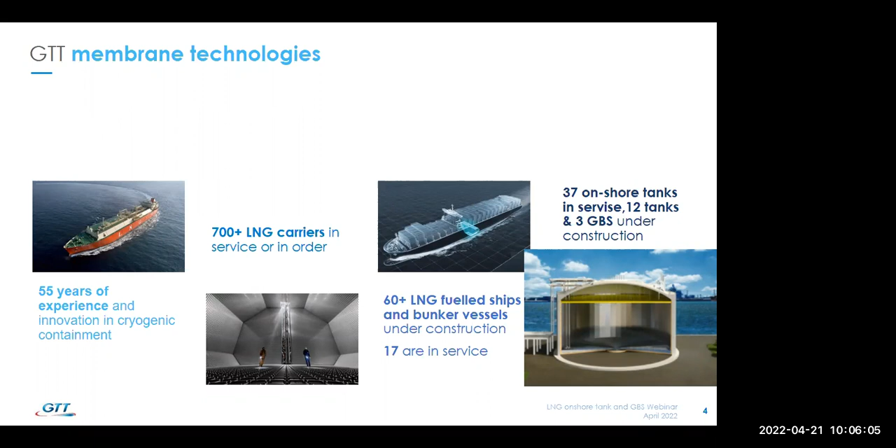Let's now dive into more details about GST technology. Our purpose here will be to present the design philosophies of GST tanks. Here, we are comparing our GST philosophy to the main onshore tank storage competitor, 9% nickel technology.

Both technologies are recognized by the main international codes to be at the same level of safety, as both systems are considered full containment, able to contain any potential leakage in the concrete envelope and avoid any gas release into the atmosphere. But the way to achieve this function is not the same, and there are some important design philosophy differences.

The main difference between both technologies is that membrane relies on separation of three functions: structural, insulation, and tightness, whereas 9% nickel uses different structures or components to achieve different functions. For example, mechanical loads from the cryogenic liquid are handled differently: by concrete structure on GST tanks, and by self-standing internal metallic structure on 9% nickel tanks.

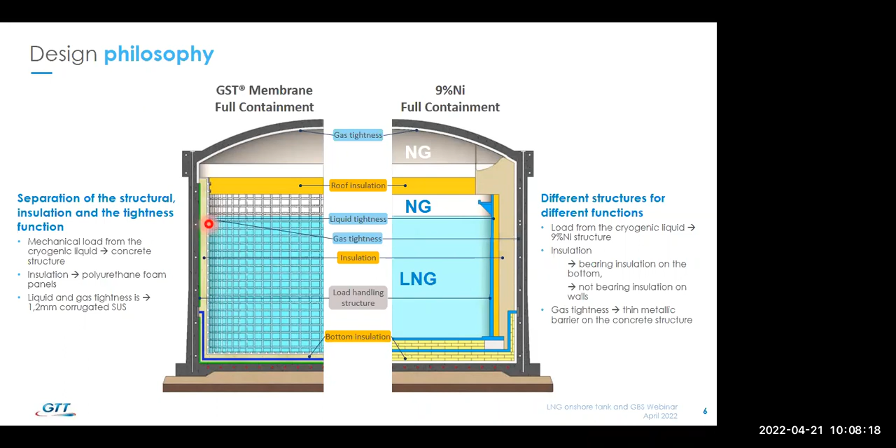The second example is that membrane tanks use so-called load-bearing insulation, made of polyurethane foam, so that the tightness barrier and insulation do not have to handle the liquid pressure load. They just transmit the load to the concrete outer tank. The last example is that both tanks have liquid and gas tightness barriers, but for membrane, tightness is guaranteed by corrugated stainless steel of 1.2 millimeter thickness.

This leads directly to my next point: what does the membrane system consist of? Technology used for membrane land storage tanks is similar to the Mark III system used for vessels, and it benefits from a very large return of experience.

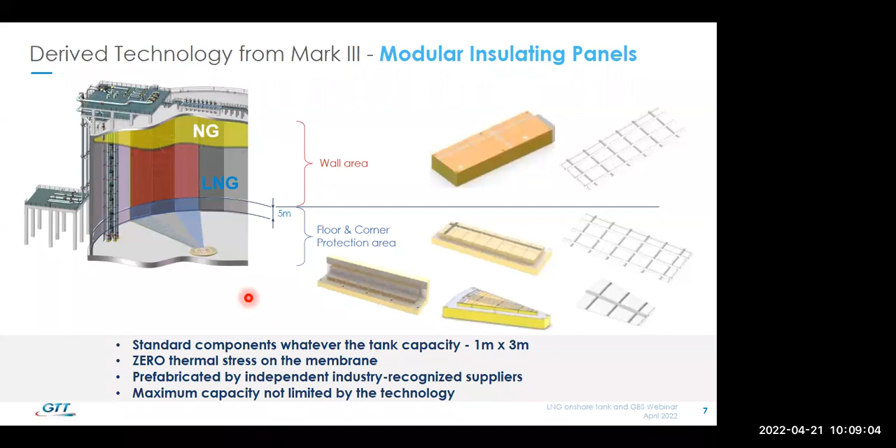For onshore tank, the design is optimized with its patented innovative arrangement, which limits the number of components. With only two elements, triangular and rectangular, 95% of tank surface can be covered. The panels are standard size, 1 by 3 meters, whatever the tank capacity.

Thanks to the double network of orthogonal corrugations of the primary membrane, which behaves like bellows and allows for free contractions and expansions, the thermal stress on the membrane is almost zero. Moreover, the membrane system has no theoretical limit of capacity. Therefore, the design limitation will come from the civil outer tank, geotechnical and seismic data, but not from the membrane system.

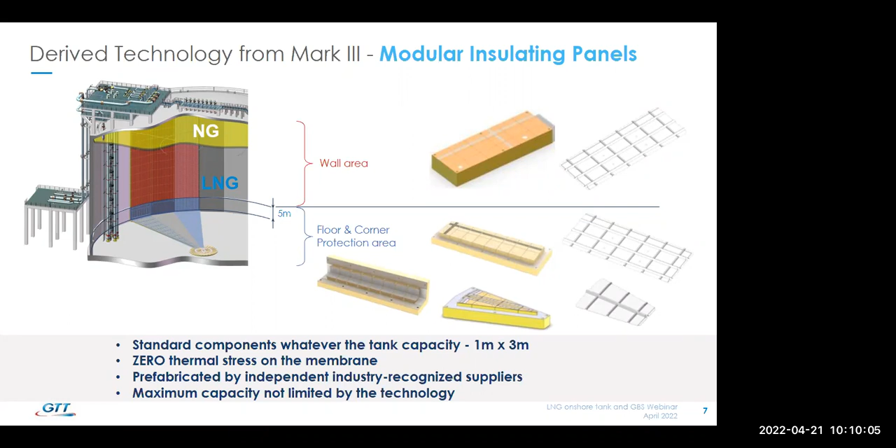What do you think? Will there be any difference if we compare two technologies with the same footprint? Let's have a look at this slide.

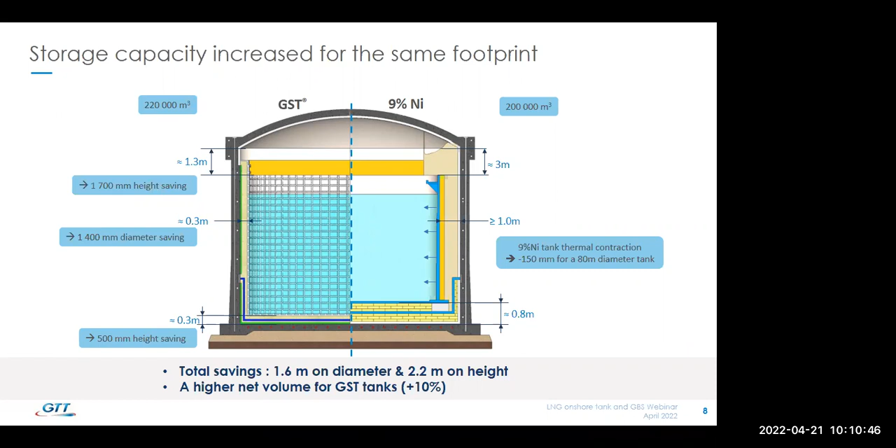Is there any way to increase the storage capacity even more? Yes. To improve the net volume even more, one of the GTT innovations is the use of the sump pit for pumps. They are dedicated to perform more efficient pumping of LNG at the bottom of the tank by minimizing the residual liquid level. This is not possible for 9% nickel tanks, as the tank shrinkage due to cryogenic temperatures will cause problems at some locations.

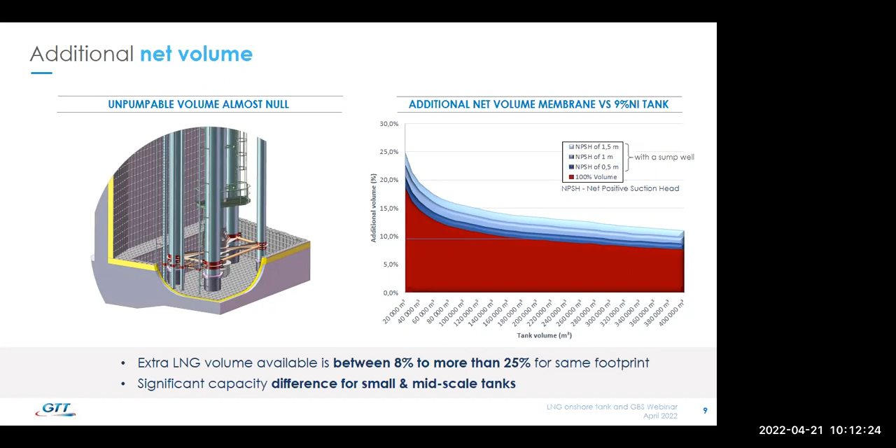Now I give the floor to Amaury, who will present environmental assessment studies.

Thank you, Natalia. In this second part of the presentation, I would like to talk about a recent study done to evaluate and compare the environmental impact of GTT and 9% nickel tank technology. Our starting point was a previous study done on CO2 emissions 5 years ago. And knowing that environmental aspects are nowadays a topic of interest due to stricter regulation, political and general will, the objective was to update and complete the picture with up-to-date tools and data.

To do so, we worked with an expert company on doing this type of assessment, which is RDC Environment. It's a Belgian company. First, I will make a brief overview of the case study hypothesis we've selected, and also on the methodology used to realize this comparison.

So to explain the case study, we can see a summary here. We are considering a 220,000 cubic meter LNG tank, which is built in China, and has standard characteristics, boil-off, lifetime, etc. Of course, both technologies are considered with the same inside volume.

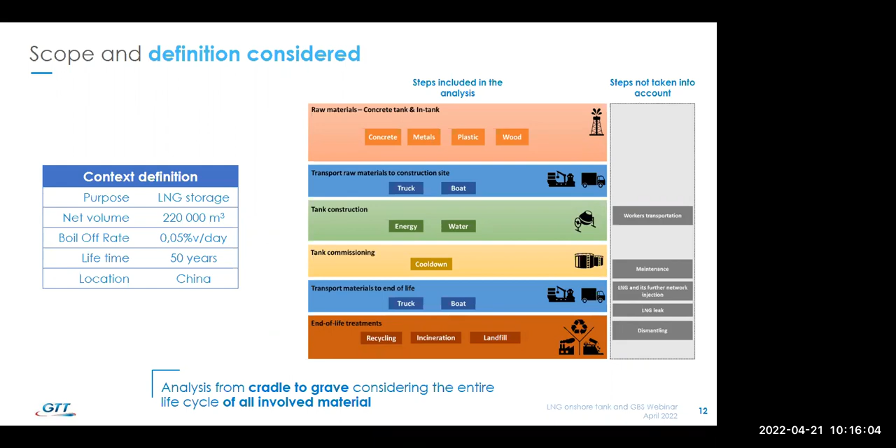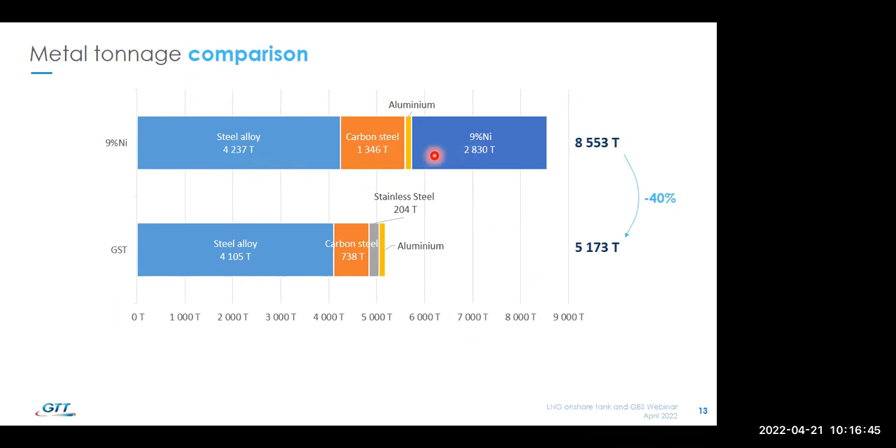It's covering the external envelope and the inside barrier. If we focus, the external envelope, mainly the concrete part, is mainly steel alloy and some carbon steel. If we focus on what is inside the tank, what is different between both tanks, meaning the 9% nickel plates composing the primary barrier inside the 9% nickel tanks, and if we consider the stainless steel, which is the barrier for the membrane tanks, we have a 75% difference of metal quantity. So that's really something important, having influence on the environmental impact.

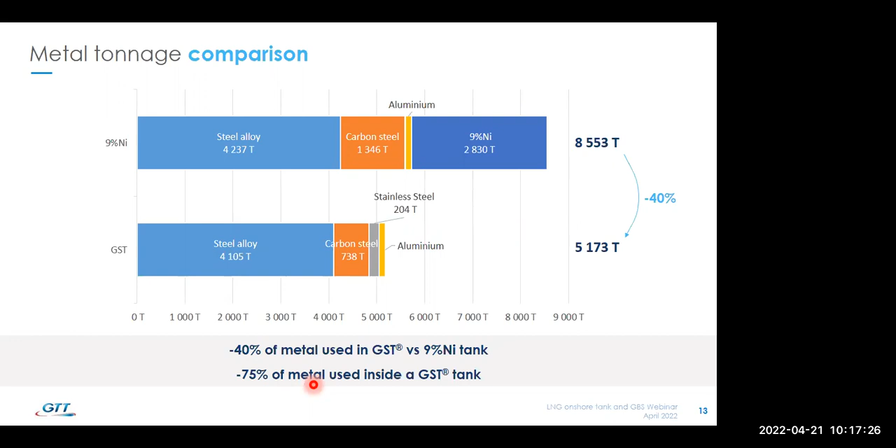So now that we had a look at the cases considered, let's have a look at the methodology used.

This study evaluates the impact on 16 different indicators, not only CO2 emission, but much more than that. These indicators are defined by the Joint Research Center, an organization providing scientific advice and support to the European Union Commission. You can see them listed here, and they can be summed up in a global figure called the average world citizen equivalent unit. Here is the ponderation factor used to sum up these different indicators, giving a global value to make a global comparison of the impacts.

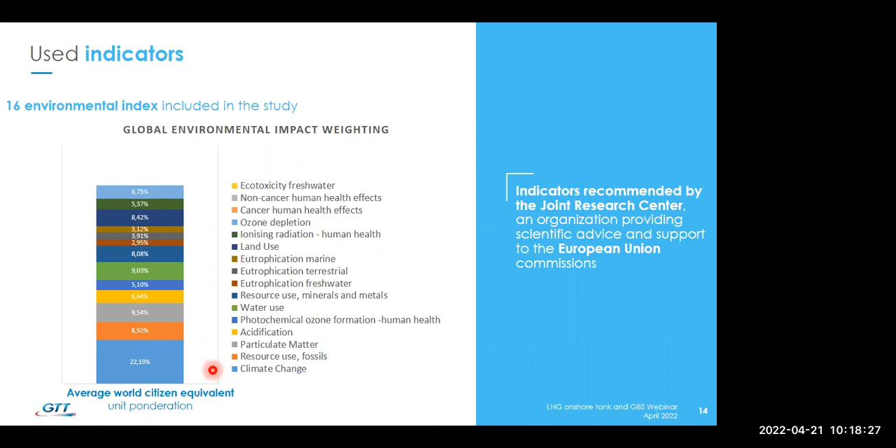So now we had a look at the hypothesis of this study, let's have a look at the results.

Here is an overall view of the results, expressed in average world citizen unit, the global figure I just presented. We can see a global difference of minus 23% of impact between 9% nickel tank, which is here, and GST technology, which is here. We can see there is difference mainly on three aspects: climate change, fossil resource use, and acidification factor. These are the main differences between both. So we are going to zoom in on these three elements in the coming slides.

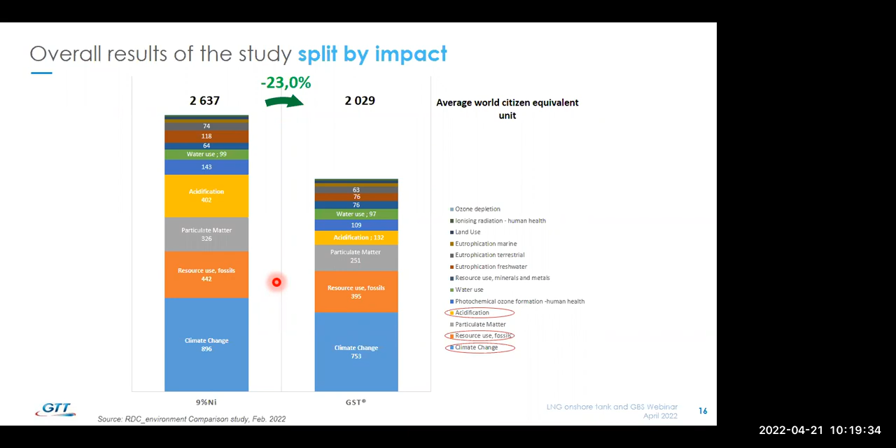Let's look at the first one, climate change. The climate change indicator is a CO2 emission equivalent unit, so in fact it's CO2 emissions. It's split here into the different sources of emissions: construction and energy emission sources, commissioning, all the transportation of different elements, material fabrication is a source of emission also, and it's also including the end of life contribution. But as it is a recycling process, it's counted as a negative value. We present results where the global total is the sum of positive emission and recycling process, which is negative, giving the global value.

Comparing both totals, we have a 16% difference between 9% nickel tank and GST. These 16% mainly come from the in-tank metal part, where we have a 62% difference of emission between both, directly linked to what I mentioned before, the mass of metal difference. To remember, there is a 75% difference of metal mass inside the tank.

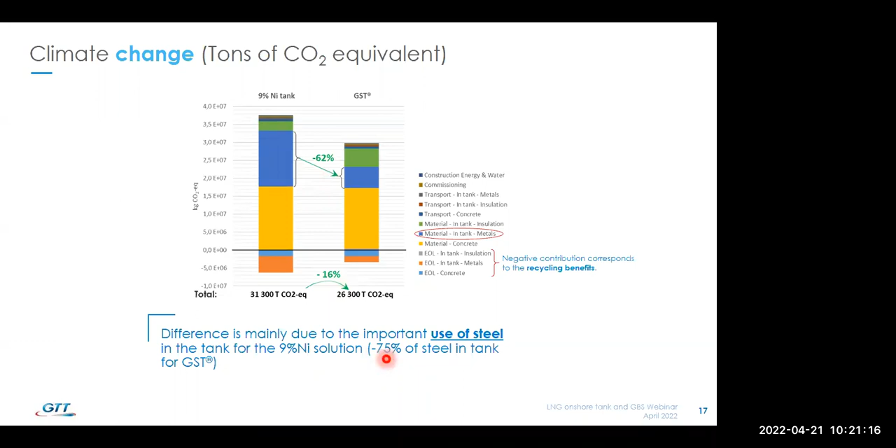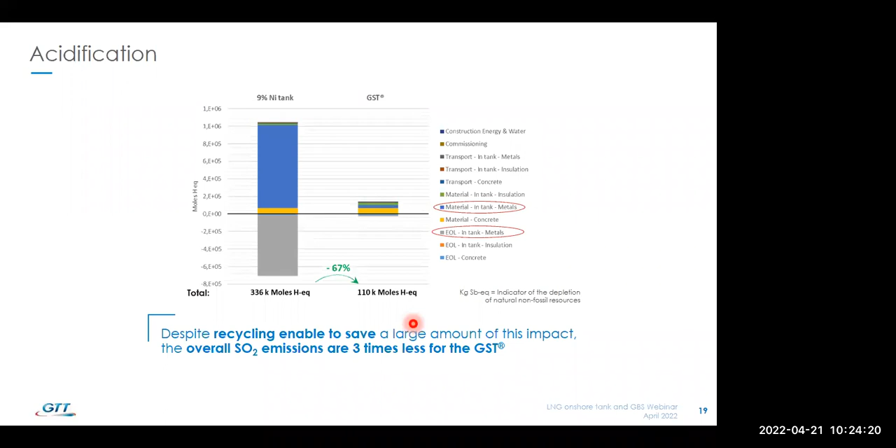Now that we had a look at the environmental aspects, we will turn to another subject and move on to the cost aspects. This is generally an important topic addressed in the investment decision for LNG onshore tanks. But do you have any idea what are the consequences of the recent metal price increase on the land storage tank solutions cost? So this is what we propose to have a look at in the coming slides.

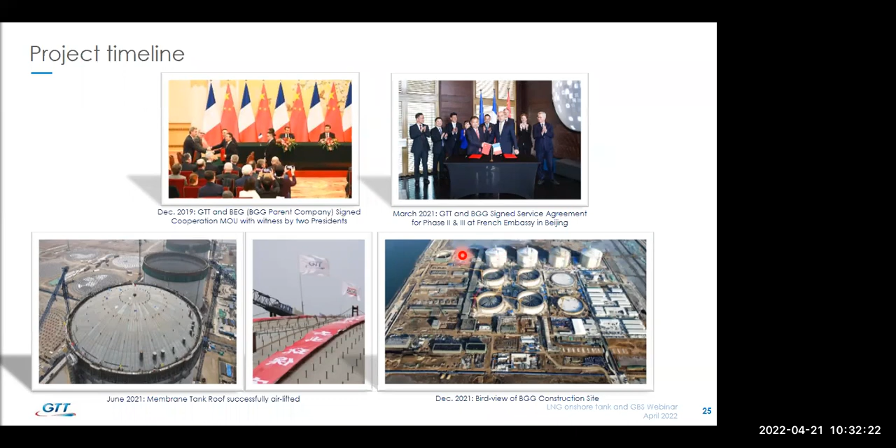On the next slide you can see some photos of the first membrane tank of this project. As you can see, the installation is going pretty well. You can see the main events such as moisture barrier application and insulation panel installation. Currently we are continuing installation of the panels on the walls of the tank.

The delivery of the first membrane tank is planned for November of this year, which gives us only 7 months to go. The second membrane tank has now finished its hydro test and is preparing for marking out and insulation panel installation.

The phases 2 and 3 of this project, which are tanks 5 to 10, are also in the concrete pouring phase now, and they will be completed in the middle of 2024.

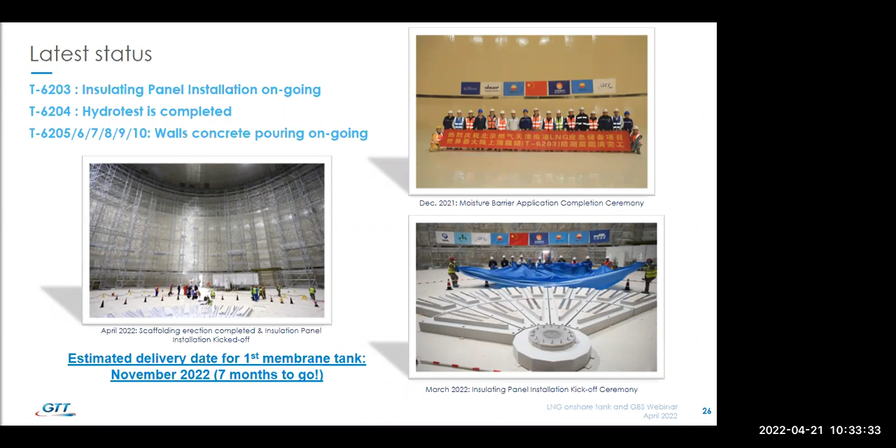The second GTT onshore tank project in China is a 29,000 cubic meter LNG peak shaving emergency storage in Hejian city, which is located 160 kilometers from Beijing.

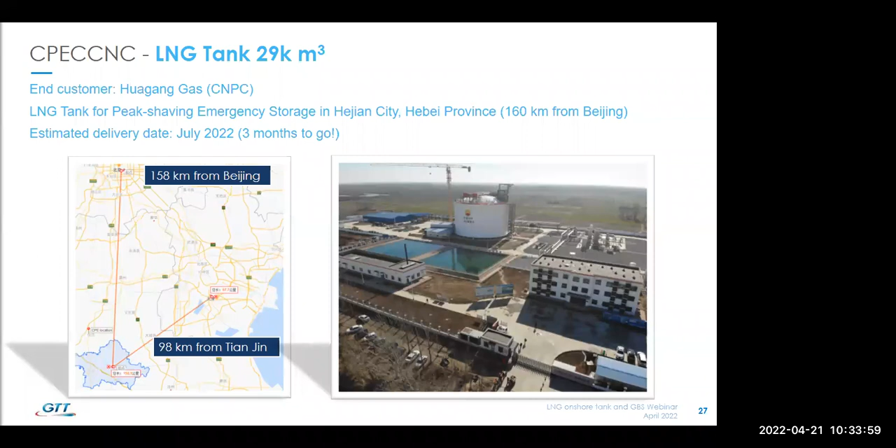The membrane installation is already finished for this tank, and final testing is ongoing currently. The delivery of this tank is planned for July of this year, which is only 3 months to go.

On this slide we just wanted to show some pictures of the main events of this project, like roof raising, the moisture barrier application, and the hydro test.

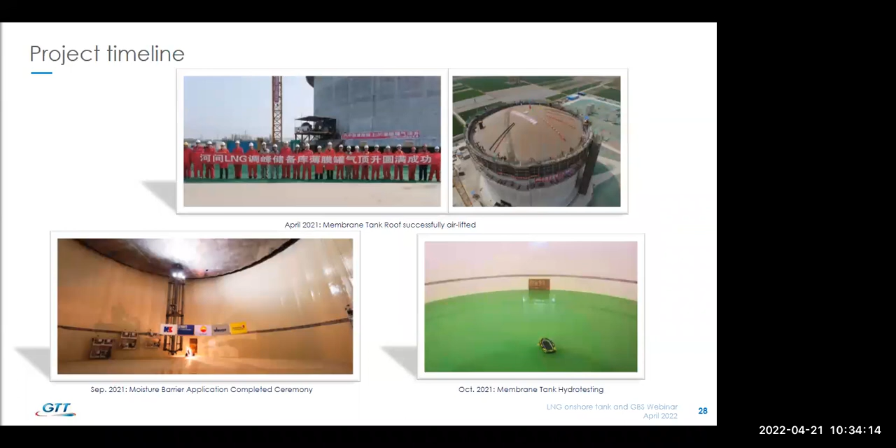The last project we wanted to present is the Arctic LNG 2 project. It's Novatek's second LNG project located opposite Sabetta, west of the Gydan Peninsula. Unlike Yamal LNG built on permafrost, these 3 gravity-based structures will be sunk in shallow water to serve as a foundation for the liquefaction train platforms.

They will be equipped with LNG storage tanks of 229,000 cubic meters each, and 2 of the GBSs will also be equipped with a small ethane tank. The GBSs are built in Novatek's new factory in Murmansk.

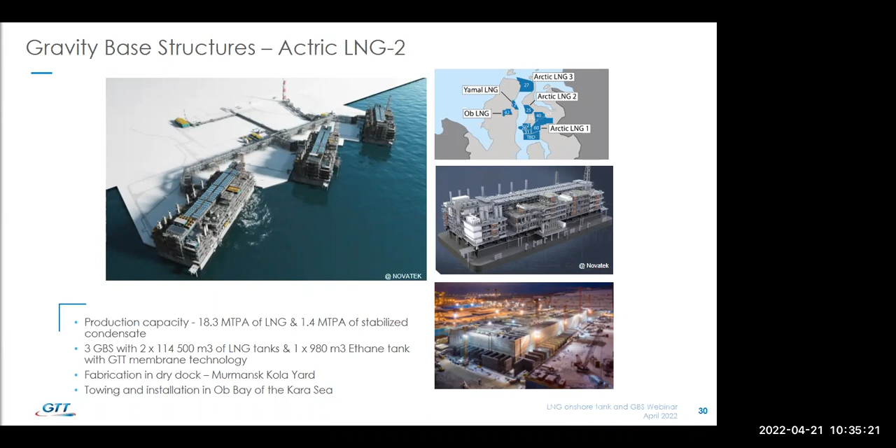On this magnificent picture you can see one of the LNG tanks of GBS-1. Impressive, isn't it? The work on GBS-1 is almost finished, and it will be towed away to its final location in Gydan already this summer.

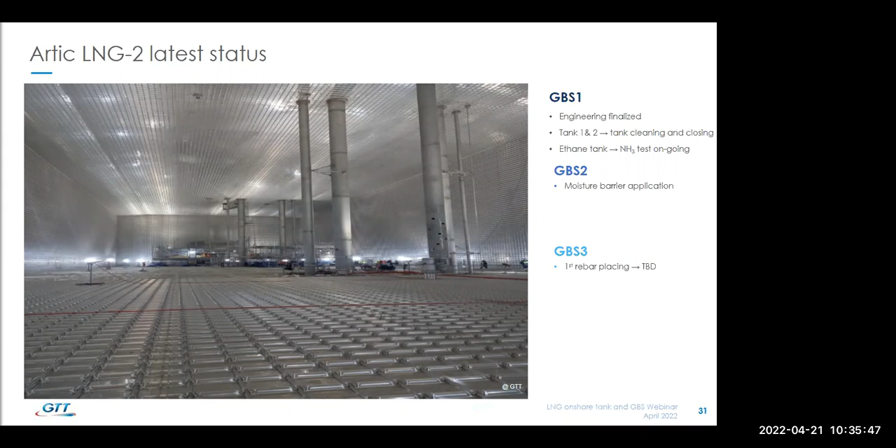The work on GBS-2 is also advancing with the ongoing moisture barrier application. On the next slide we just wanted to show you some photos from the construction site, here you can see the installation of the insulation panels and the membrane wall.

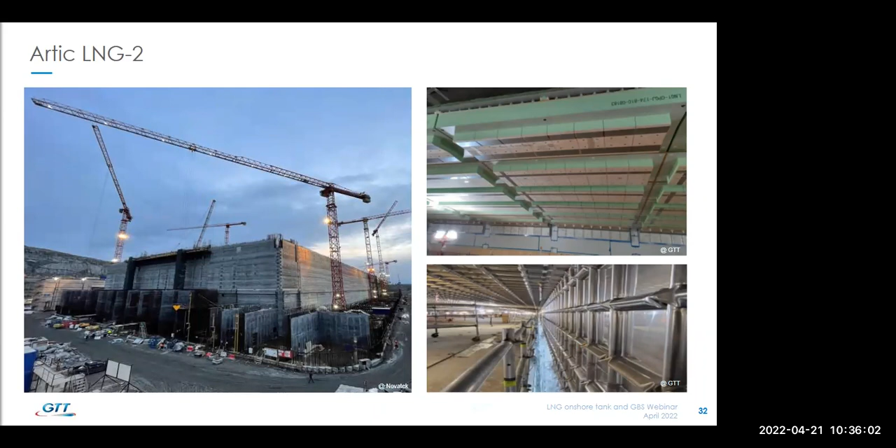Now I give the floor back to Amaury, who will present the future-ready tanks.

Thank you. We are now approaching the end of this presentation, but before finishing, let's focus on what could be the future of GTT. So mainly in view of decarbonization, ammonia could be one of the solutions. This slide sums up what is GTT's ammonia compatibility status, so to say that ammonia compatibility is well underway for GTT.

It's recognized that the stainless steel barrier we are using is compatible with LNG and ammonia, whereas 9% nickel steel is not. So it means that we could be able to store in the same GST tank LNG and ammonia.

But to do so, there are some adaptations to the tank structure that have to be reinforced in regard of the ammonia density. We propose also to set up reinforced tightness testing procedures to be realized either at construction stage or retrofit stage, in order to guarantee that no ammonia will go into the insulation. And finally, additional compatibility tests are ongoing.

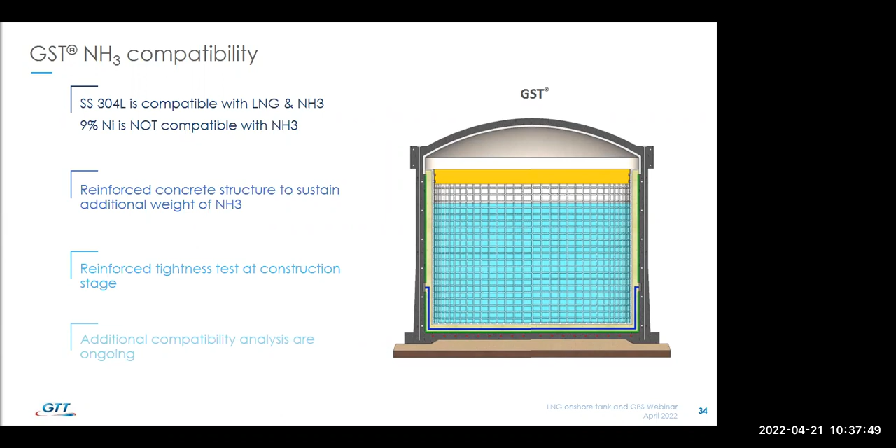So if we sum up the status of this compatibility, we can say that it's on a very good way, but there are still some checks ongoing to confirm it.

So we are now moving to the conclusion of this presentation, and let's have a recap of the main messages. GST enabled to store at least 10% more LNG in the same footprint thanks to a thinner insulation.

GST onshore technology offers higher maximum capacities. It's the most eco-friendly solution with a reduction of 23% on the environmental impact. It is less dependent on raw material prices such as metal and nickel prices evolution, and the ammonia compatibility shall be

available, and a testing campaign shall soon conclude on that. So to conclude, let's say that GST is the most sustainable LNG tank storage system.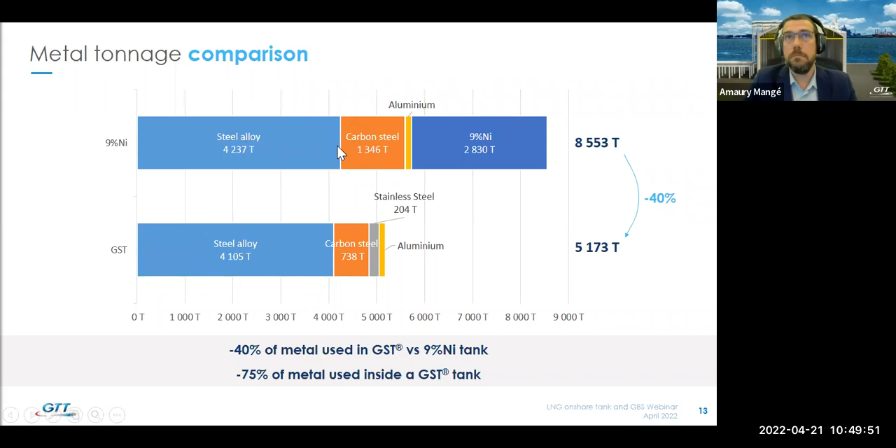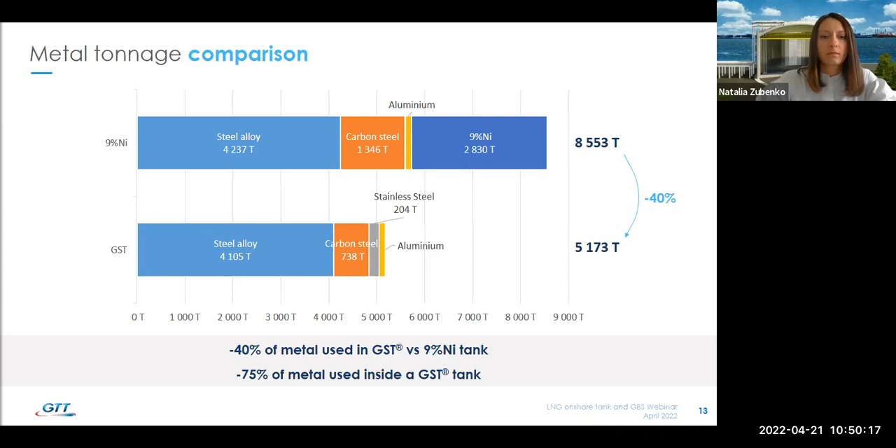Okay, thank you. I think the next question is also related to steel grade: is only carbon steel and stainless steel used for onshore storage tank Mark III technology, or can NO96 technology also be used for onshore storage? For onshore storage, we only propose the GST technology, which uses stainless steel membrane.

We would not be proposing any solution nowadays with an Invar solution technology, which is coming from the NO96 technology. So the only solution we propose here is stainless steel for the barrier.

Okay, thank you. Next question is about the boil-off rate. If the thickness of insulation panels is increased, can the GTT boil-off rate be further reduced compared with 0.05%? That's a good question.

So the comparison we've made here was with the same boil-off rate, same performance of the tank, and you see that insulation thickness is different. However, we can increase the thickness of the insulation we propose, so we can reduce the boil-off rate if requested. That's a possibility, depending on the specification requested. So yes, we can have that.

But I can give another example from a recent project. For 220,000 cubic meters, we can go up to 0.04%, for example, with standard insulation panels of 400 millimeters. So basically, the bigger the tank, the easier it could be to go even below 0.05%.